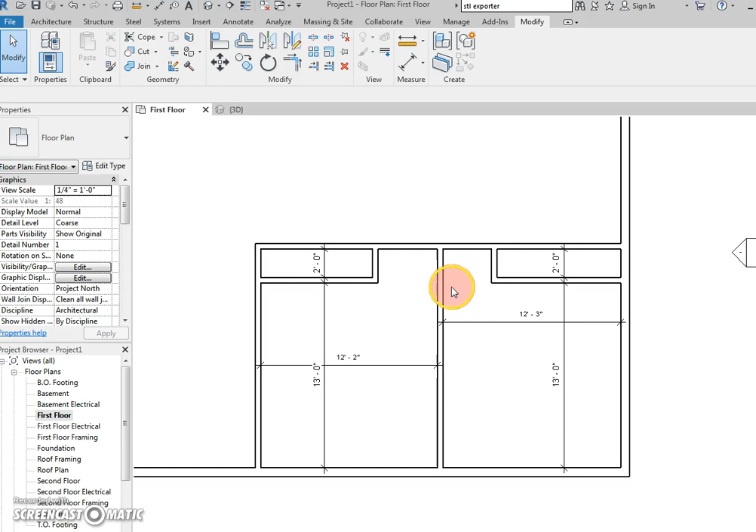Okay, so this might be driving you nuts that this is different. Let me show you how to fix it if you want to. If you want to keep it like that, that's fine. But for those of you who are picky about your measurements, if you want to do an inch, here's how. You click on your wall, either one, it doesn't matter. You go 12 space 2.5. Now they're both exactly the same. If you want to change it, you can. If you're not, I don't care, there's no skin off my back.

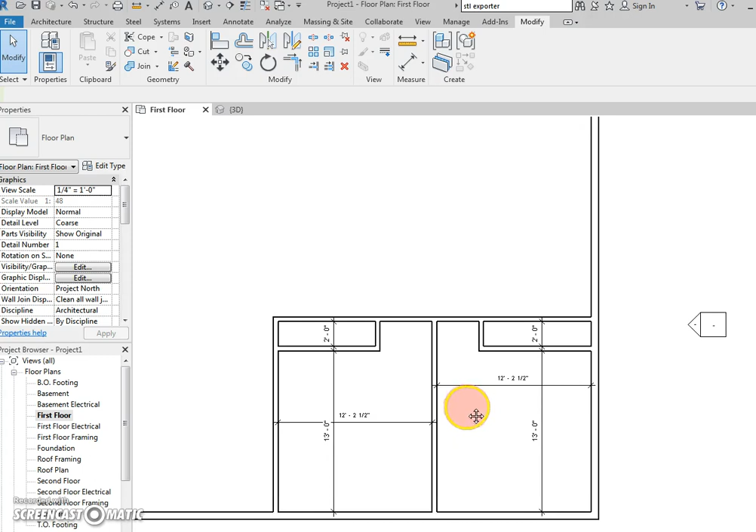Okay, so I want to make these walls line up now. All I'm going to do is drag this guy up here so it's in the same place. Oops, not tall enough, get it into the wall. You don't have spaces in your wall at home. If you do, you've got a major problem with your house.

Okay, so now that's up, you're sitting pretty. Let's draw the rest of this area up here. I'm just spitballing here guys, just guessing my butt off here. I'm going to grab this wall and bring it up. You don't make holes for doors. Okay, I'm just going to put this here. I may adjust the bedrooms again based on what I see, I don't know.

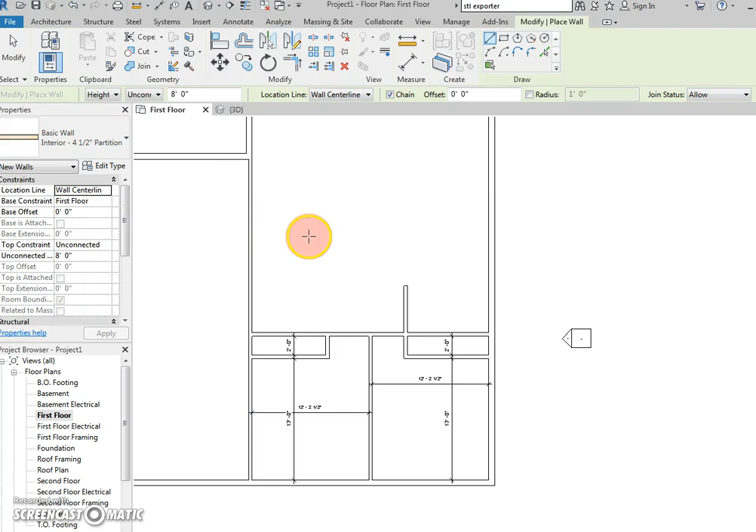So I'm going to go over here. It doesn't matter if you're interior or exterior, that doesn't matter in this one. This wall goes all the way over like this.

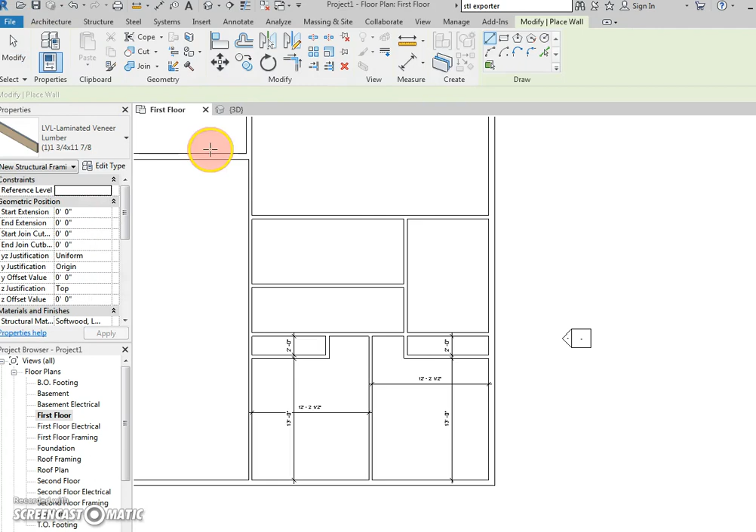I'm just going to take you, I press escape, I'm going to draw you up like this. Like I said, I am just drawing walls. That's a beam, I don't want that, I pressed the wrong button, I apologize for that. There we go. There's a wall about here.

There's this closet right here. This kind of goes over to here and over like this to here. I'll show you how to fix this in a minute.

And you're probably confused by now, but that's okay. Draw something that looks similar to this, okay? So just draw this out like this. And actually this wall here, what I'm just going to do is drag it down, it's much easier than doing the split and stuff. I'll show you that at another date, okay? So I got my walls laid out. So take a moment, do this. You can pause my video right now, and then you can go from there, okay?

Okay, you're back. Let's add measurements. Here we go. So the hallway needs a measurement. Let's change these as we do them, that way we're not bouncing around as much. Click this, change this to 3. Common hallway width is 3 feet, love it.

Go like this. Okay, I like nice round measurements, don't like it when they're all over the place, so I'm going to click this wall here. Let's make this 9 feet. Why? Because I said so. Don't you love whenever your parents say that? Because I said so, I'm not your parent. Now also look at this, all my measurements line up. If yours are wonky like this or like this, please try to line them up. It just makes it look neater, and it's kind of standard protocol on this.

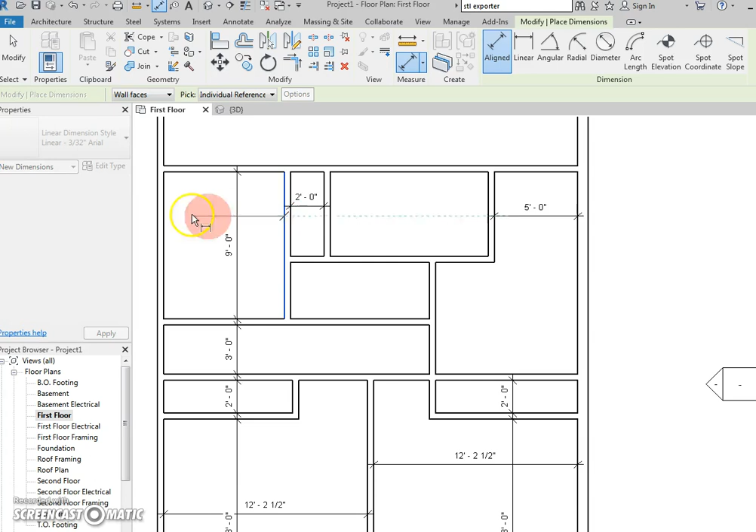So let's put another measurement here. Let's put another measurement here. I don't really care how big these are, to be honest, it doesn't matter to me. Move this guy up so they line up. Oh, that looks better.

Okay, our mechanical room is a little bit big, but what do I care? Actually, here's how you're going to change that. Let's click this wall here and make this 9 feet, so let's make this room kind of square. And you see that? That 2 did not change. Okay.

This closet here, I need to fix because this should be 2 feet as well. So I'm going to click this guy right here and make him 2 feet.

Now at this point, if we want to make a change, we could, but I'm kind of happy to see how things are looking right now. So I'm just going to leave it as is. But just for the sake of my own knowledge, let's just put some measurements on here, just so we have them all on. Okay.

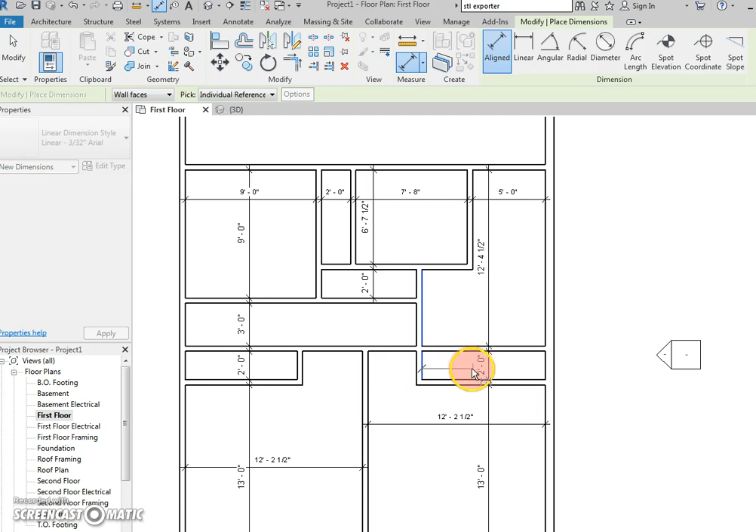Ooh, we never measured this. Let's put a measurement in your closet. This I am going to drag down. Now you could, if you wanted to, move these things around, so I have freedom to be able to do this if I really wanted to. Let's make this closet 8 feet.

Okay, now we have plenty of room here for my door. So in order to keep things the same, I'm going to put a measurement here, click this, and make this 8 feet as well. Okay, so that's finished.

This side of the house is done. That was easy, wasn't it? Hang on, that was easy. That's better. All right, that's how we roll in my class.

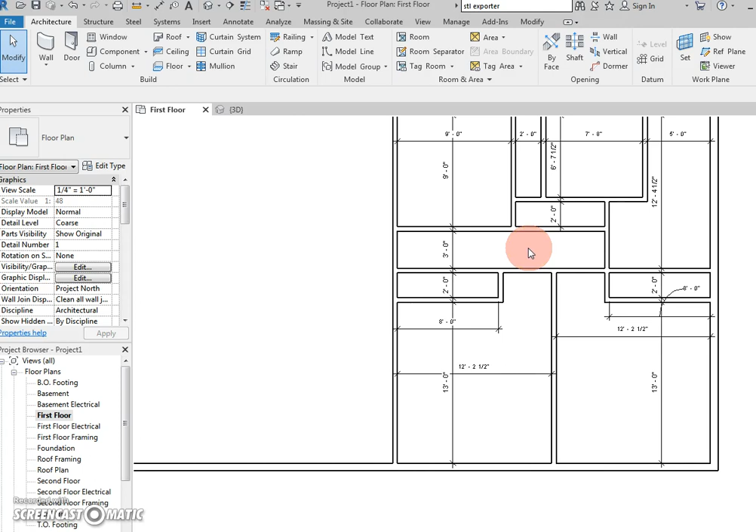All right, so let's go over here to the other rest of the house, because we may end up making this shorter, I don't know. So according to our original drawing, our great room, which apparently is great, is about 21 feet or so, and I'm going to keep it around that. I don't want to go too much bigger, which looks like I'm going to have to make my house a little smaller, which is fine.

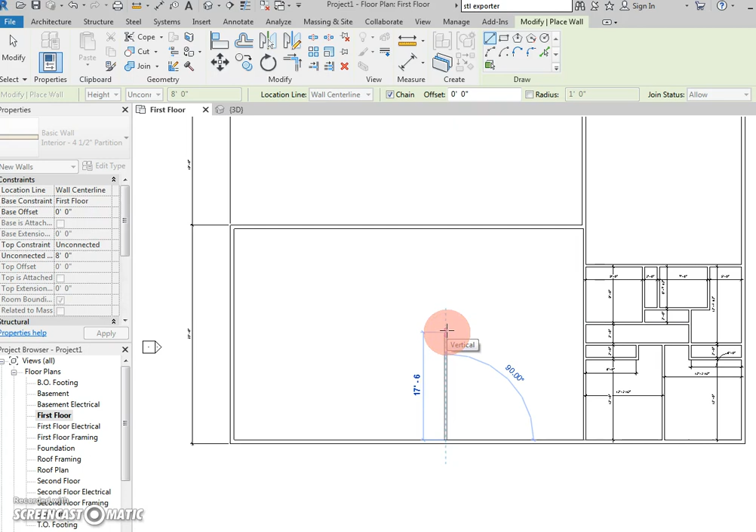So I'm going to take this guy, and I'm going to shoot him up here about 18 feet, just like we did on the other drawing. Well, it does line up, about right there. So make it try to line up with him, and then press escape.

Okay, so I see I have a lot of space here, and watch this guys. I'm going to take this, I'm just going to slide it over. By the way, the arrows work too. So I'm touching an arrow right now, and every time I touch this arrow, it moves it 6 inches. So left and right, left and right.

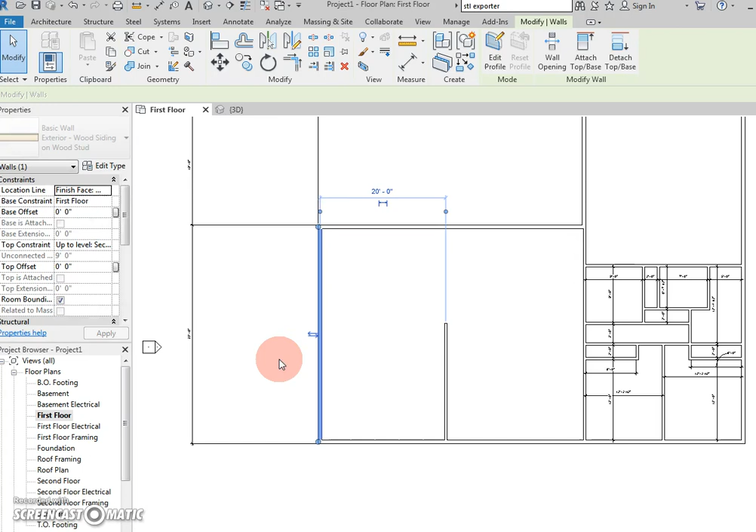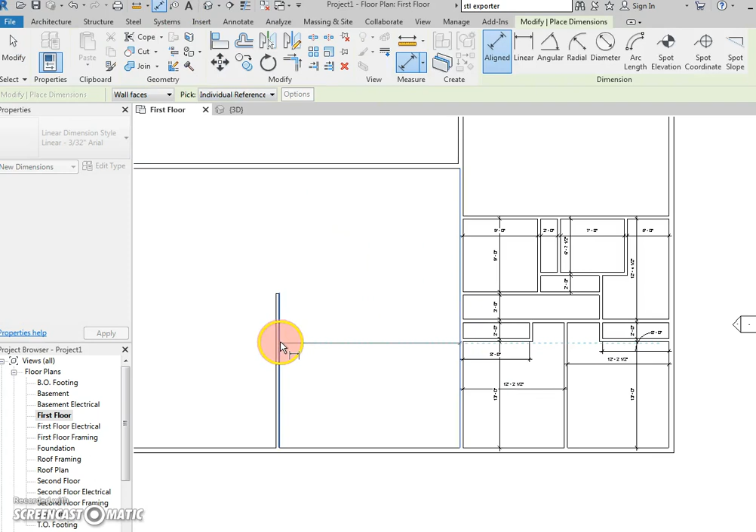I'm going to make this about right here, okay? Let's go 40. Yeah, let's go about right there, okay? So, like I said, I'm big on measurements, so we're just going to keep doing this as we go through this. So I'm going to add a measurement from here to here, and I don't like 7/8 of an inch. That doesn't make me feel all good inside. So click this wall here and make this saying 22.

Nice round number. Okay, we need to do our walk-in closet and master bath now.

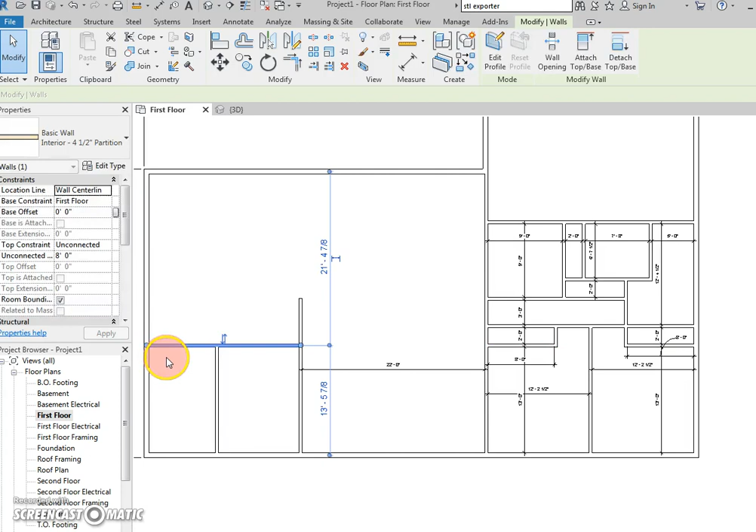I'm going to put this about right here, or about right there. Okay, I'm going to click this wall and I'm going to bring it out here. There we go. Okay, let's dimension that. Like I said, try to have your measurements line up, just makes things a little bit neater.

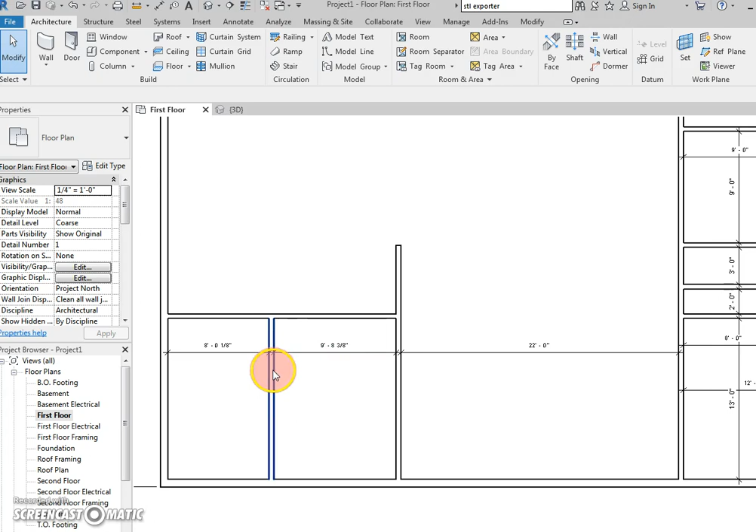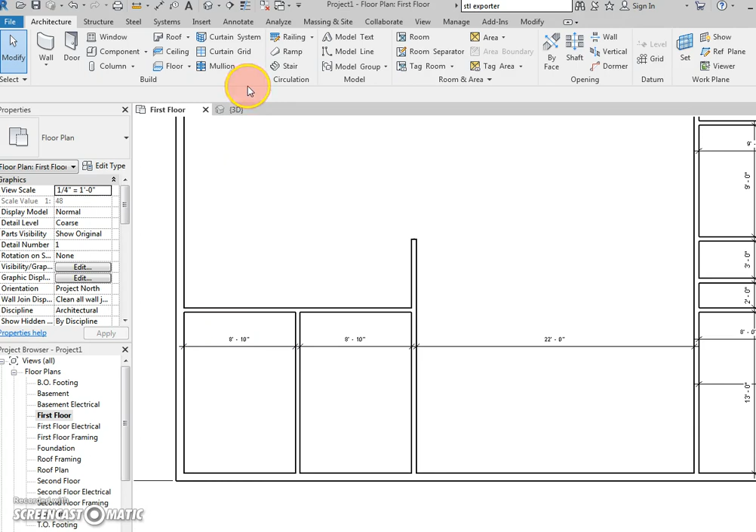Okay, so I want these to be about equal. Let's go 9 feet. Go 8'-10", should be about close. There we go. Good enough there. If you're really anal and you want to make it 8'-10" on this side, just click this wall here and change this to 8'-10". That way they're both the same. Okay, let's go up and down here. Like this, 13 feet, I can live with that if you can. Okay, I know this is going to be way too tall.

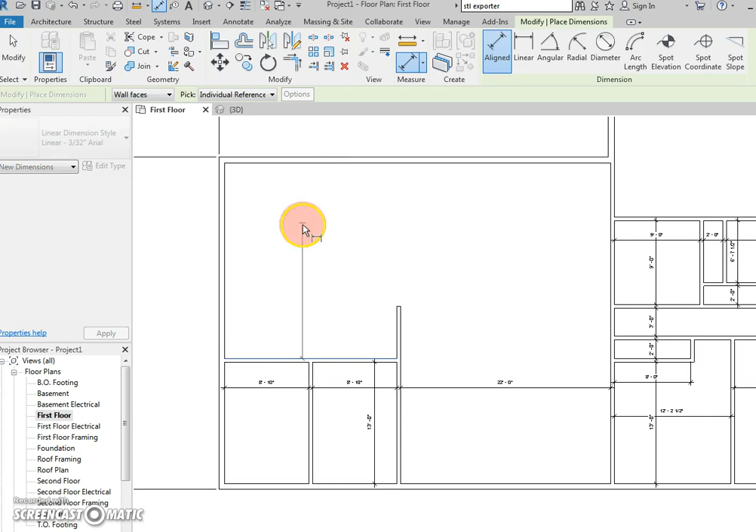Let's see how big this area is, because my master suite might be ginormous, and you don't want too much space. So I'm going to press escape, click this wall here, and change this to 19 feet. Not a whole lot, but if you're going to fill a room, you don't want to fill it with too much stuff.

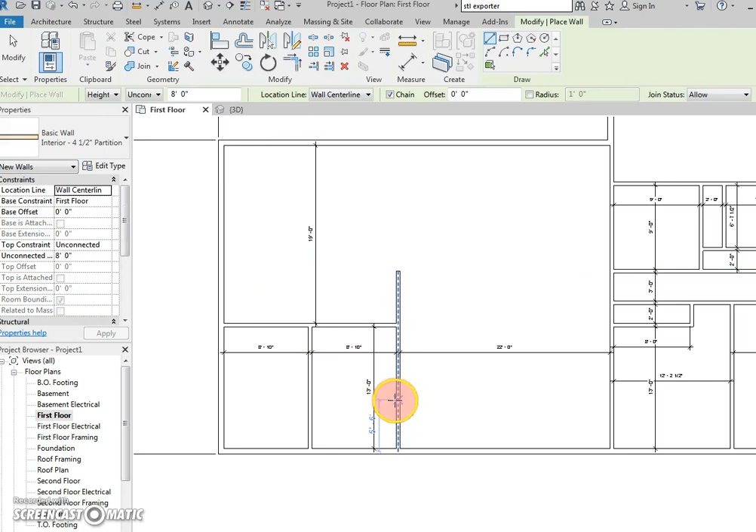Next, we're going to draw in the closet. About 2 feet out here, I'm going to go right to here. Once again, add measurements. Standard closet width, you know this, 2 feet.

This I'm going to leave up here because I don't want this to interfere with everything else. But I'll put a dimension here to here. Let's go 7 feet on this.

As you remember, the kitchen wall kind of lines up with this, so I'm going to bring my... I did touch this time. I'm going to bring it up about 3 feet or so, and it's going to kind of jump over. As soon as it jumps, I'm going to click and draw this wall going straight up.

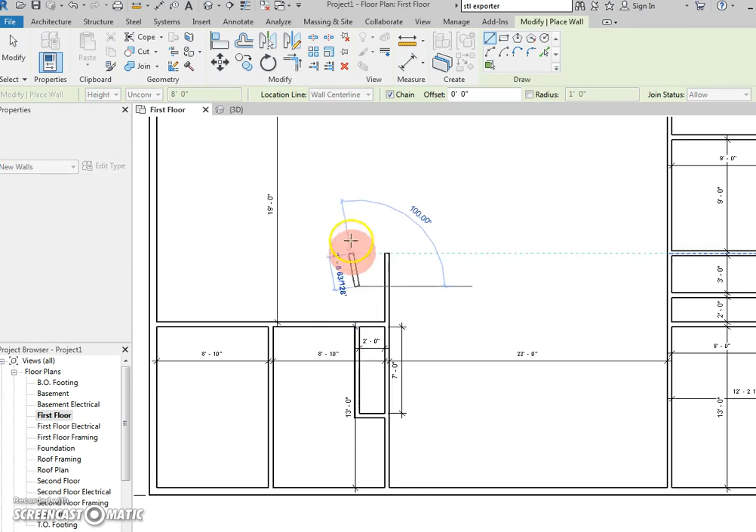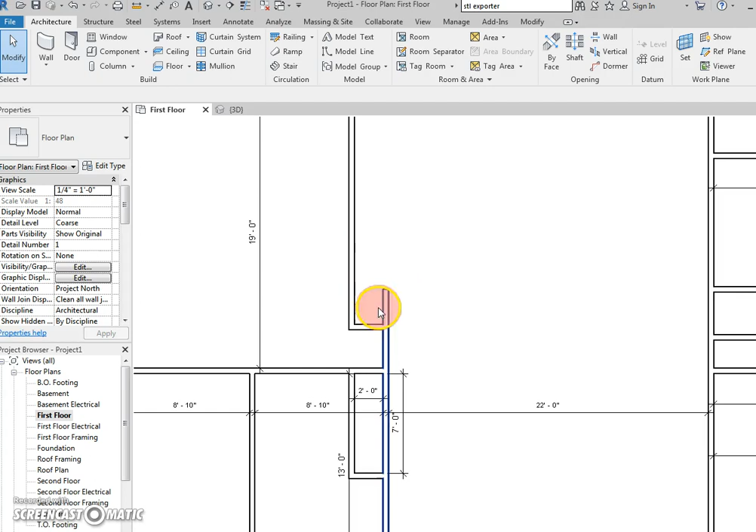Now I do want to show you guys something kind of neat. Let's say I want to draw a wall right here, but I have this kind of carryover right here, and let's say I don't want it. I do, but I don't this time. I want to show you how to make this a corner.

So what I do is click the wall right here, it doesn't matter where along the wall you do it, and click this little thing called trim and extend. I can click that, click this, and it rounds that off. I don't want to do that, but I want to show you that anyway. Sorry, I don't know if I'm wasting your time, but there you go.

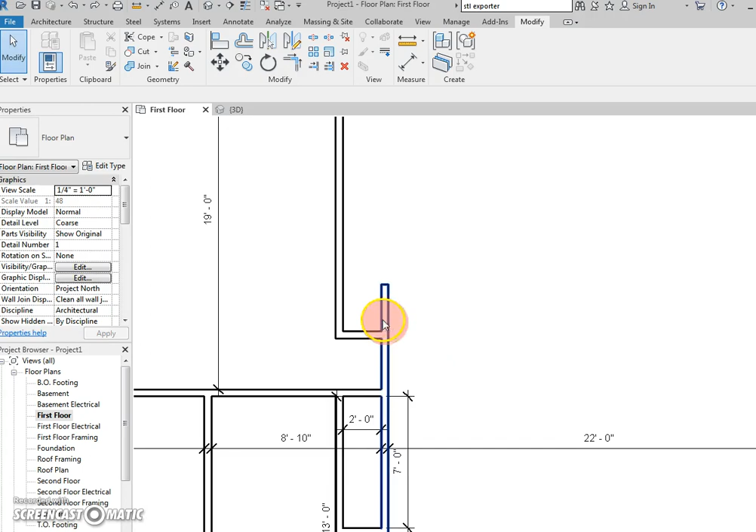So to fix that, of course you press Control-Z and you have your little food pantry closet back. So let's draw a wall right here. Oops, that was ugly. Okay, there we go, we got the little closet in there.

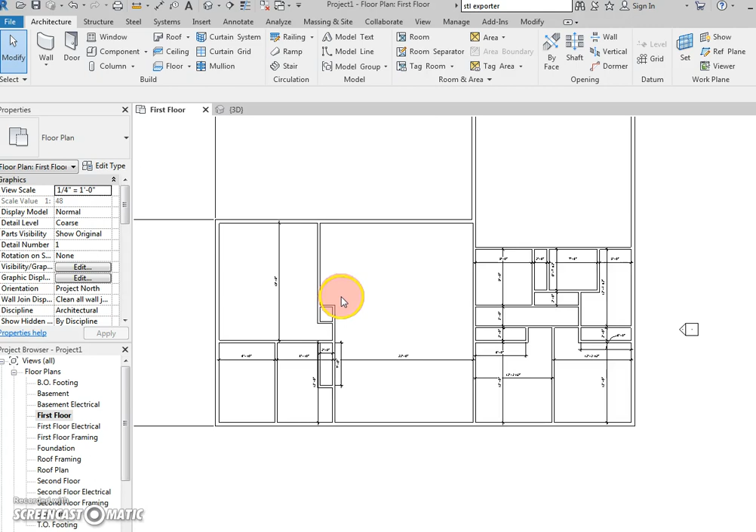Your dimension should be fine on this. Oh, hey, look at this, I worked for about 30 minutes, so it's prompted me to save. Nice feature about this program. So press save.

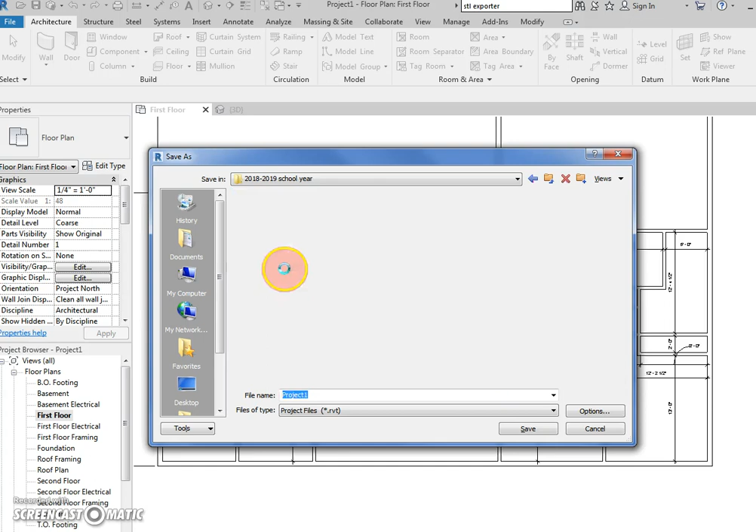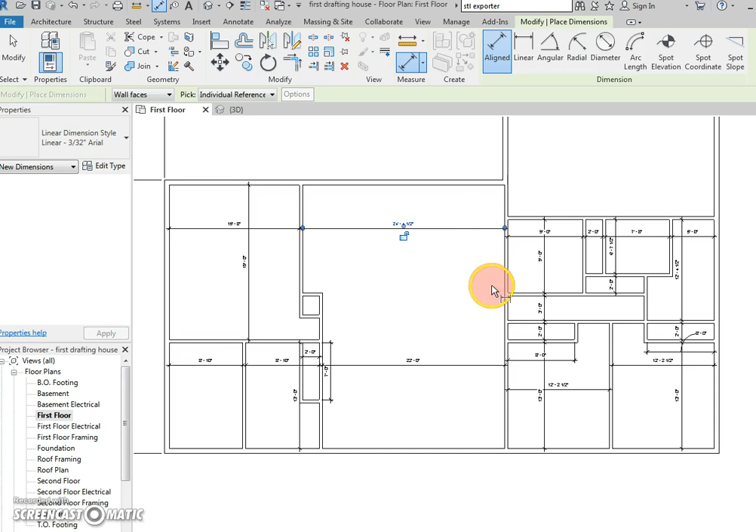There we go. All right, let's figure out some other measurements. I just want to put these in just so I know how big things are. That's a good measurement, if yours are a tad different from mine, it's not a big deal. Let's put a height on the garage. Garage you can leave whatever size, I don't care. You can put a couple cars in it later. Yeah, that's fine, if you want to leave it like that, I could care less.

Okay, so your overall outside walls are done. I'm going to stop this video right here while we're at it. So your walls are done. I know, right? It was that easy to make all your walls in your house. Next video, we'll probably start going over doors and windows, and we'll go from there. I hope you're enjoying this so far, I know I am.